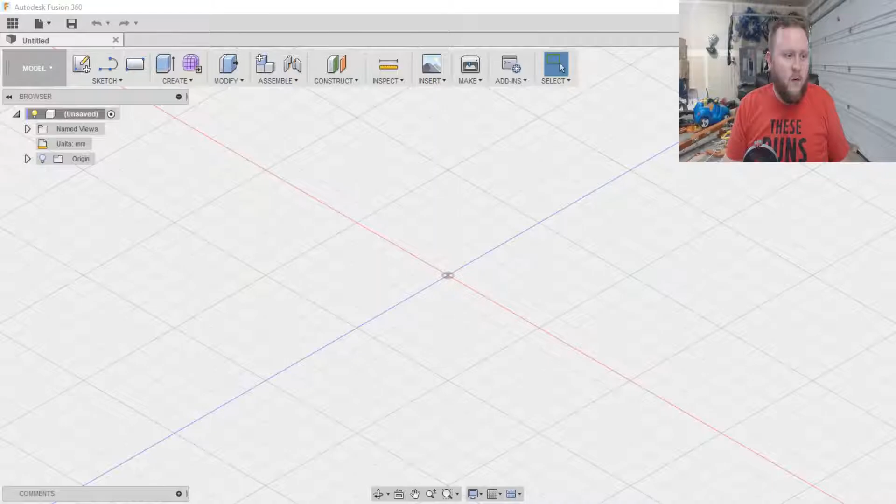So what I'm going to do today is show you what I did in Fusion 360, what I designed to fix that bracket and repair it using what I had available. So let's switch on over now to Fusion 360.

I'm going to warn everyone right now, I am by no means a modeling expert. I barely consider myself a modeling beginner. But I knew enough to get by with what I needed.

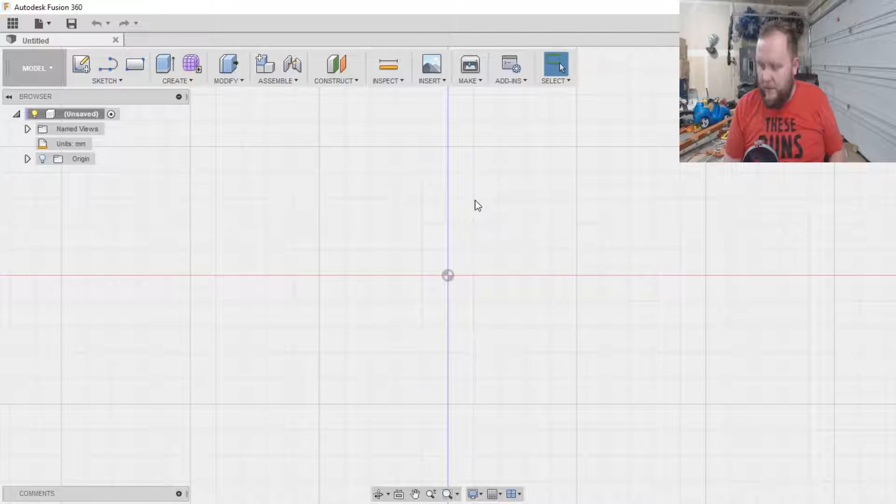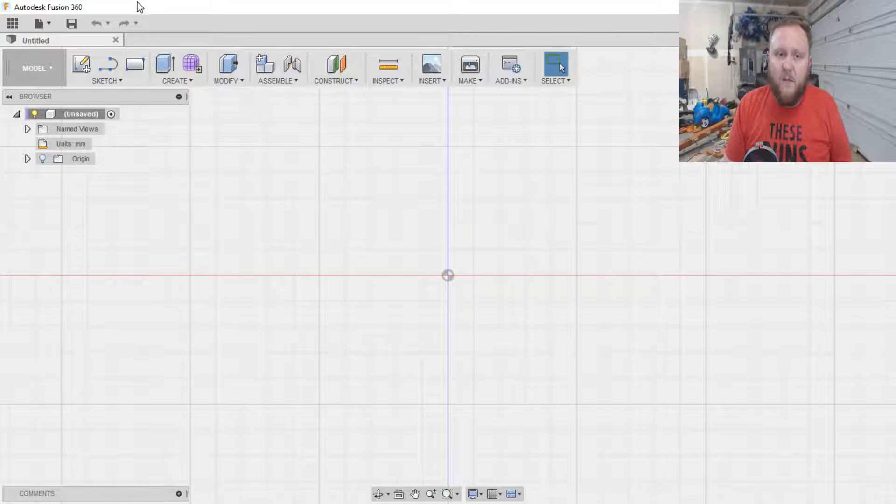So what I did is I took off the existing bracket, which I don't have in front of me at the moment, but it's just the little end piece, and I measured it out with my calipers. I figured out the general dimensions, and then I took a piece of paper originally and sketched out a basic idea of what I was going to do. So now I'm going to show you what I did with that drawing.

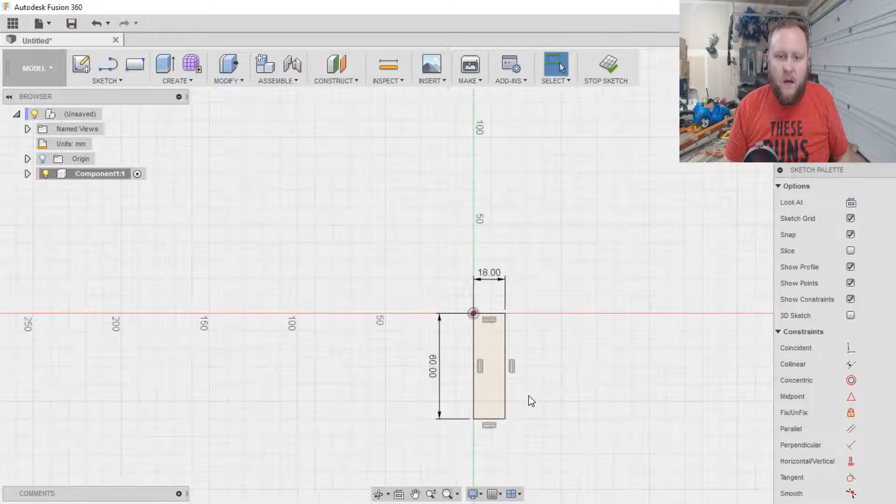So I'm going to start a new component, beginning with the basic original shape, which I needed at 18 by 60. Alright, so that's the basic general shape I'm working with.

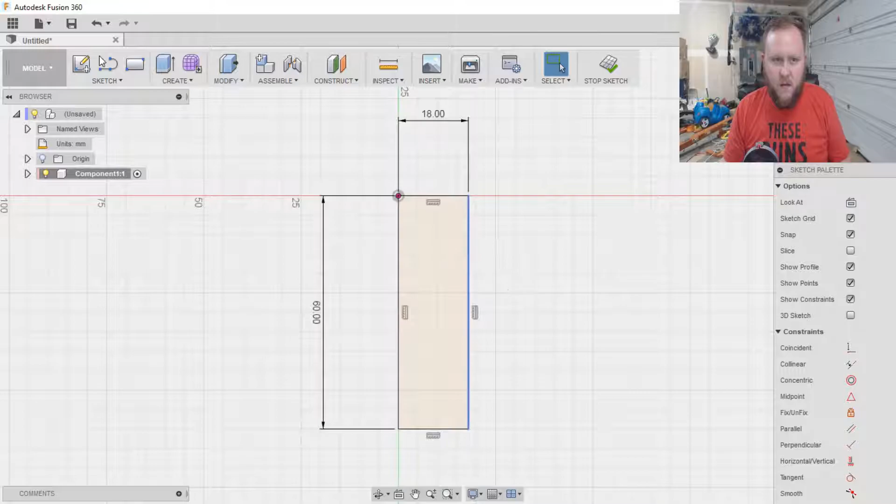And then on the inside, I need to make another rectangle that is 29 by 16... by 29. Oh, nope.

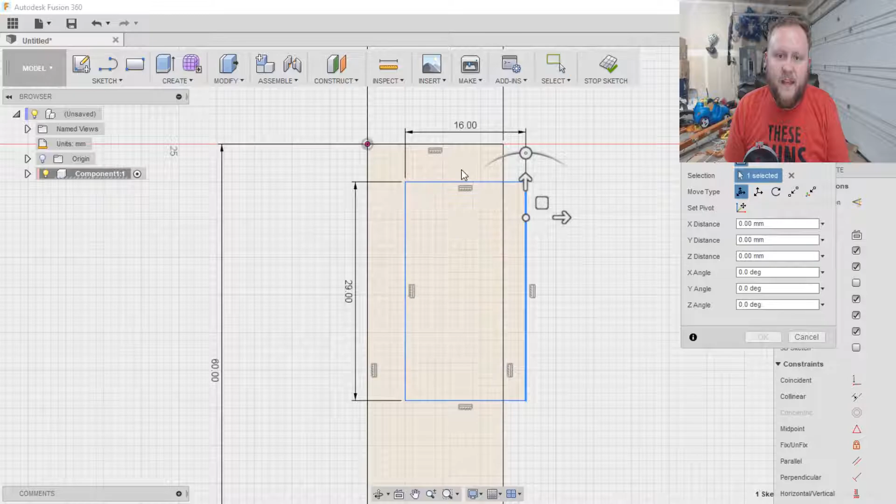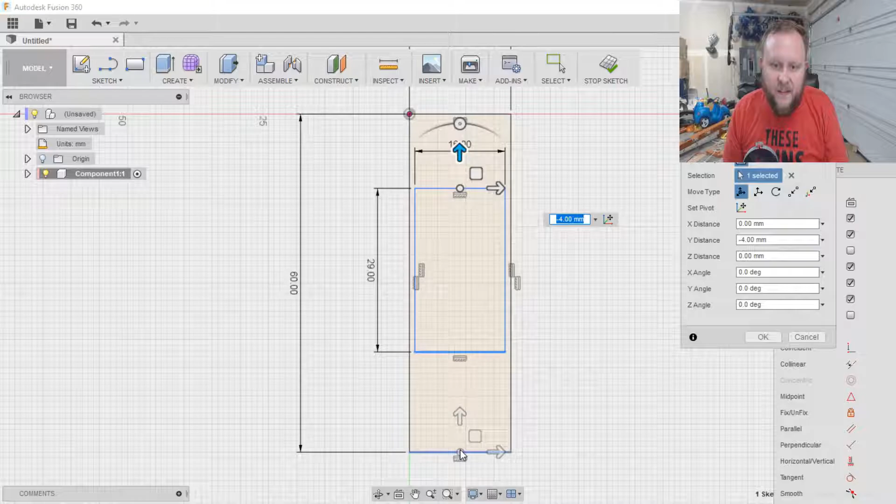Like I said, I'm by no means any kind of expert. Anything you see me do here should not be duplicated in real life. Let's see. That'll need to come down. Nope, not that one, that one. Let's see, like I said, quick and dirty way of doing it.

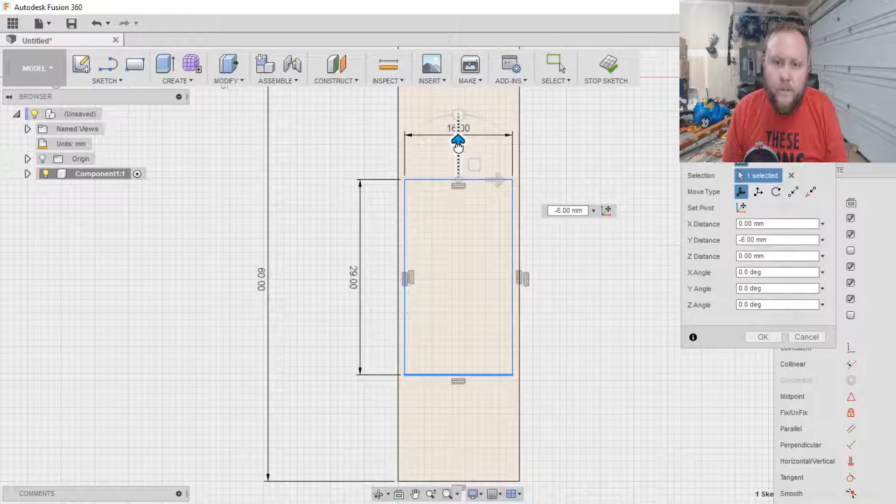Counting the squares: 1, 2, 3, 5, 10, 18. So I need to move it down a few more notches. Alright, that looks good, close enough to me. I'll maybe have to fix that here in a minute.

So that is the outer diameter of the bracket I need to make. And then I need to make another rectangle that is 2 millimeters smaller on all sides, and that'll be the inside diameter.

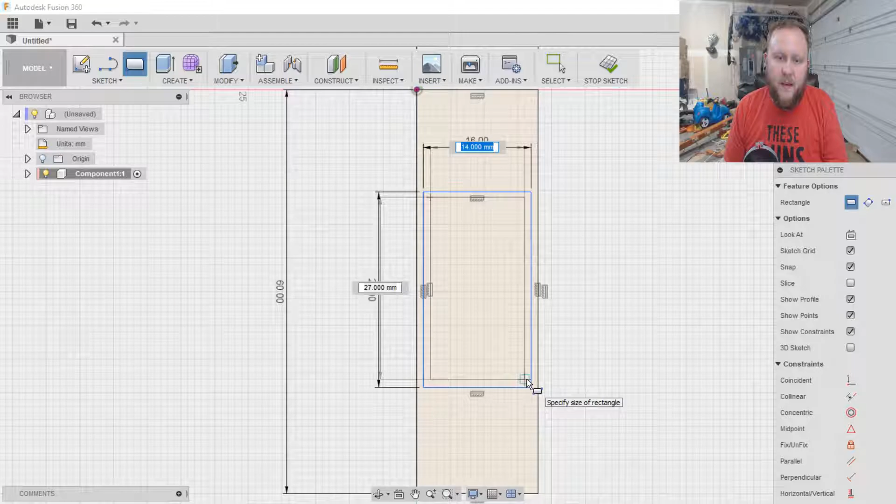Which is 14 by... hey, look at that, happens to be that exact measurement on the inside. So what we got here is the basic shape we're looking for. So the next thing I need to do is add the circle that's going to go for the screw holes.

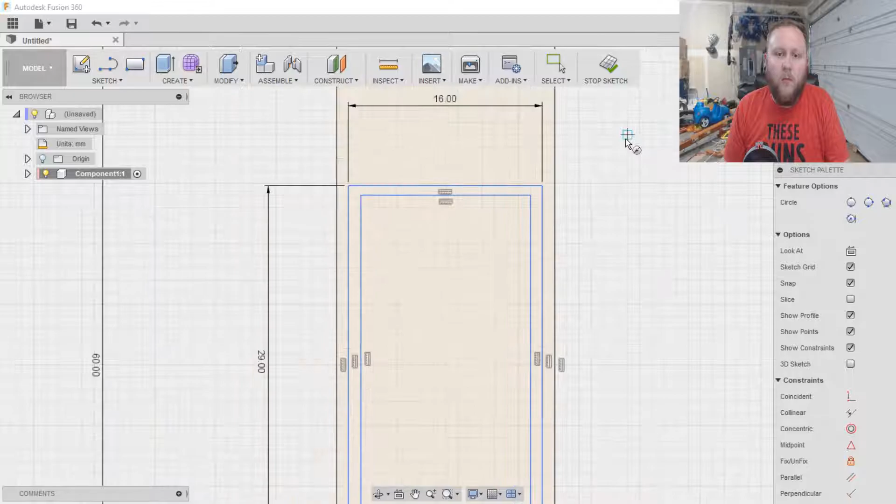So I'm just going to, and I know I made those 8 millimeters in diameter. Alright, and here's where I'm going to start, because those other ones I didn't measure out, but this I have measured out, and I need it to be a certain distance. So from that edge I need it to be 10, and from this edge, 8. Right? No.

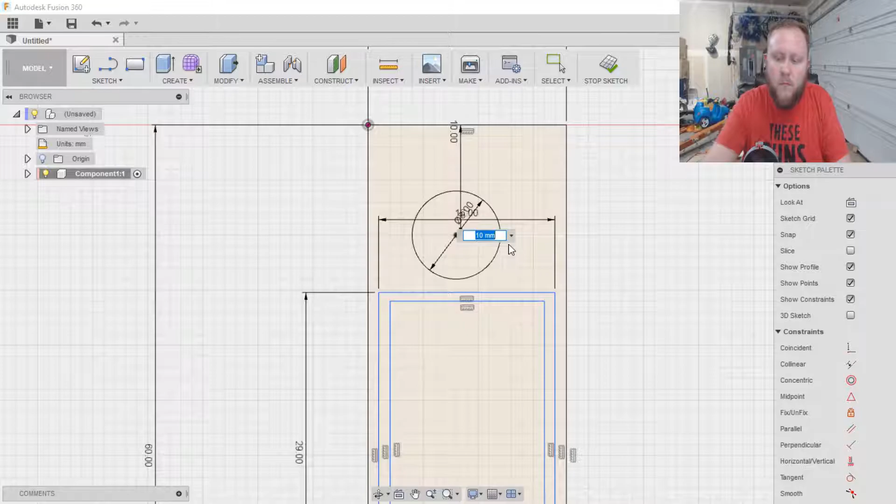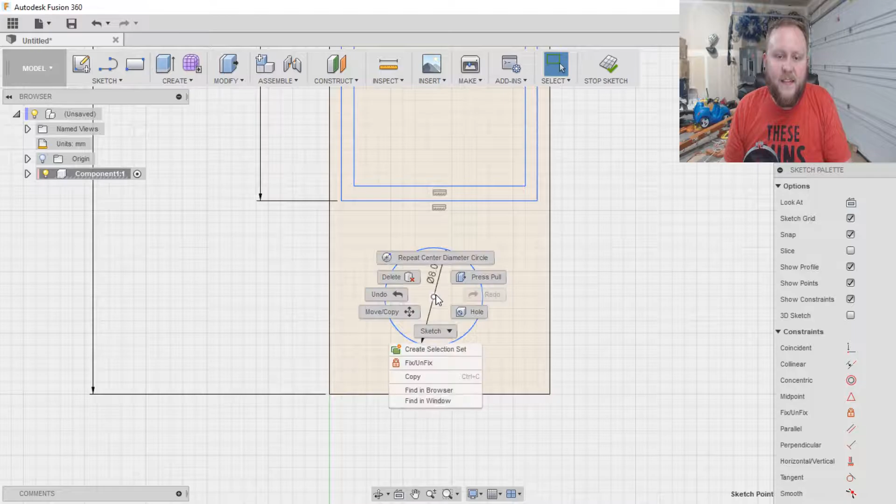I got those numbers backwards. 10. Apparently I didn't do my math right on that one. This is why you should always double check your work. But so, 10 and 9, and then I'll do another circle at the bottom. Like I said, this is quick and dirty. I lucked out when I made this, and I made it right the first go.

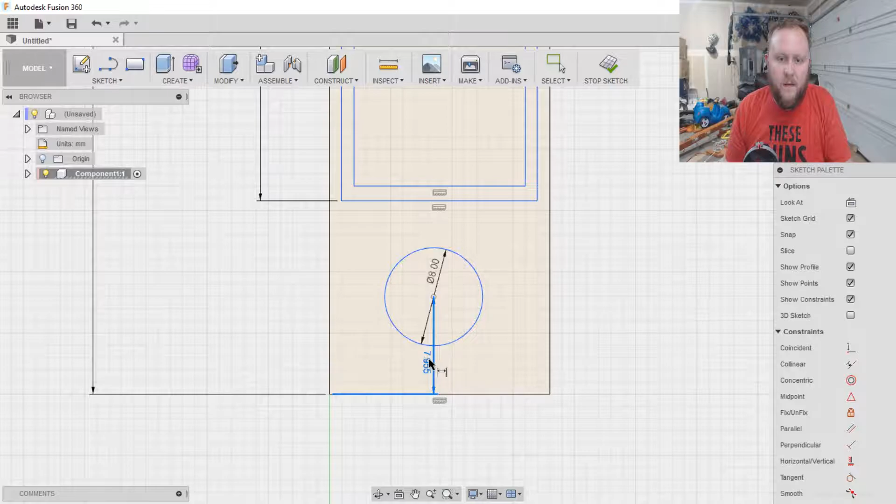What we're working with there is 9, so I was close in putting it. Alright, so we now have a basic shape of the bracket.

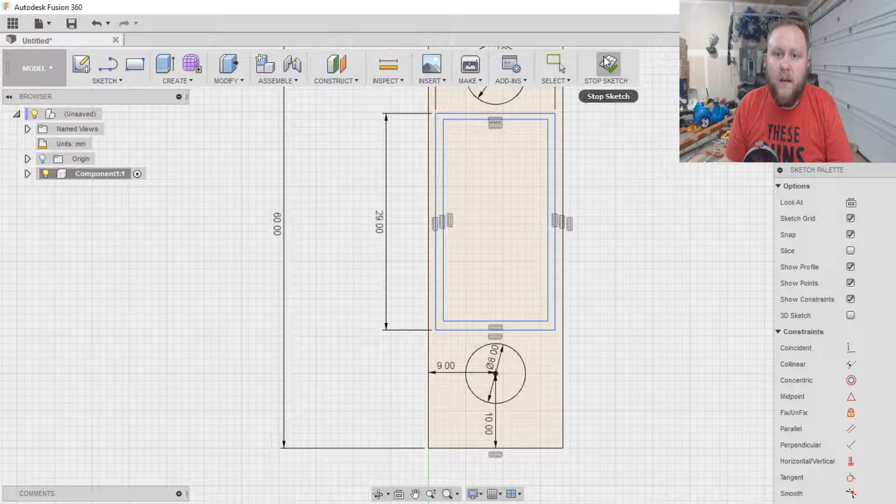Now what I need to do is start extruding out these pieces. I'm going to start with the base here, and I made that, extruding it out 5 millimeters - that's what I did the first time around. So look, we got a little side view there, kind of what that looks like with the holes.

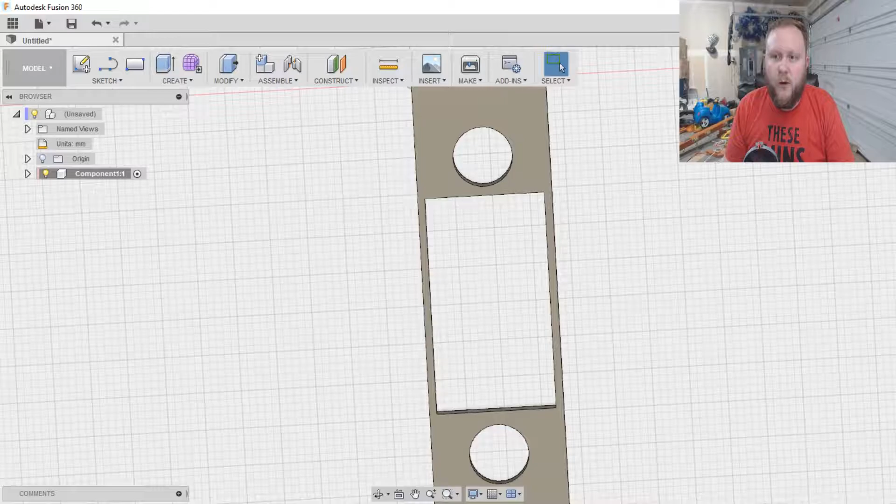Perfect. Alright, so now, hold on. We need to... there we go. Make the sketch visible again, that helps.

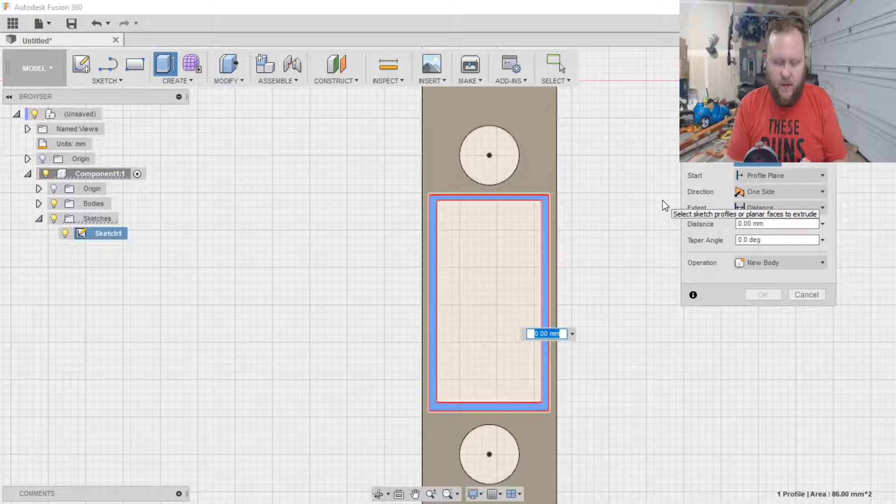So now we're going to extrude another body here. We're going to do that one - I'm double checking some of my work here. I did 50, so I made that 50. And there we go. That is the simple, dirty, and quick way I made a bracket to fix my barbecue.

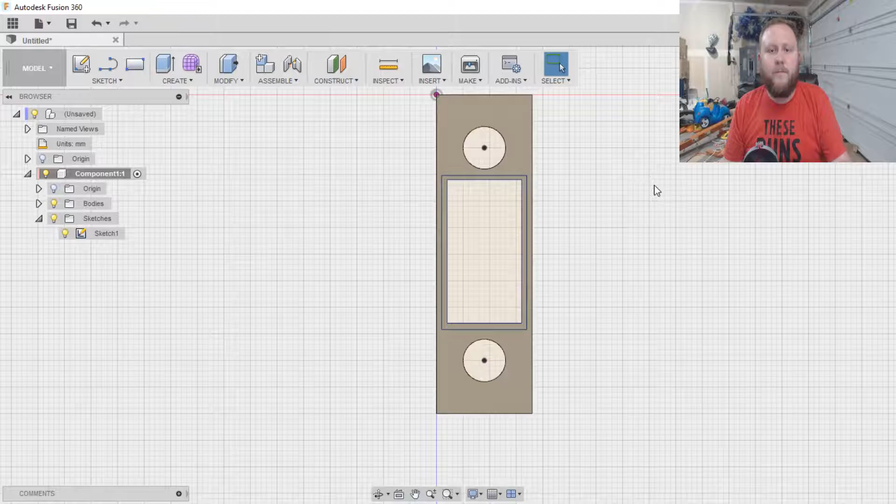So now what we're going to do is export this for 3D printing. I'm going to select - you gotta make sure it's all selected. I was having problems with that my first go, so make sure it's all selected. I'm not using one of their print utilities.

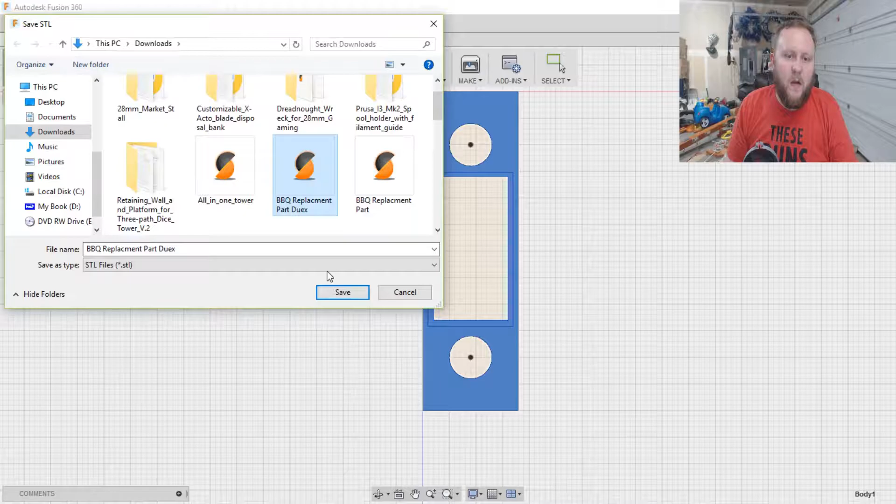Instead, I'm just going to save it as barbecue replacement part. So I saved that, and here I'm going to put a video so you can watch the time lapse of it being made.

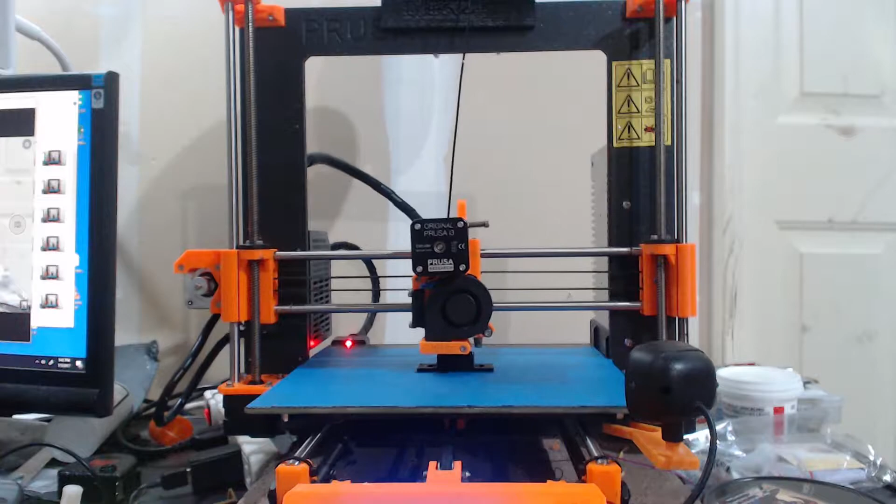So let's go inside and I'll give you my final thoughts.

Alright, so there we go. That's my quick and dirty way I fixed my barbecue using my 3D printer. I learned a little bit while I was doing it, that's for sure - making the tolerances, trying to make sure everything's measured out. If you're wanting to build replacement parts or things like that, I highly suggest picking up some kind of caliper. It'll greatly help your work. That's for sure, it helped me a lot here.